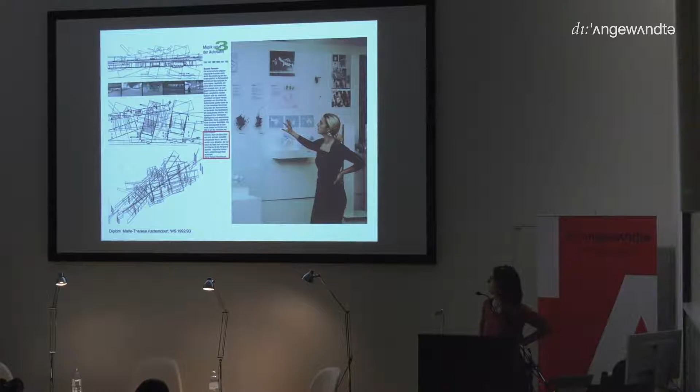So when I did my diploma, so old pictures, I was already dealing with zones under the motorway. It was all about abandoned space that should be available for people to appropriate. Something that we went on also later on.

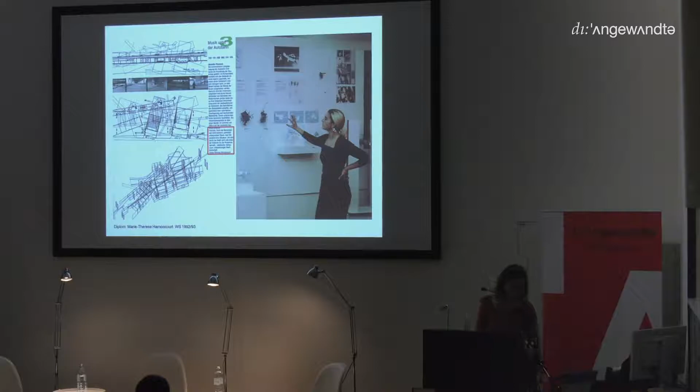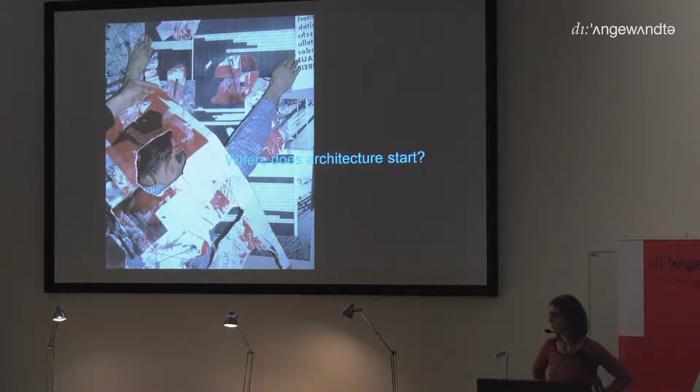I decided to go back to work, to go on working with the so-called group of former students of Wolf, like Wolfgang Grillitsch and Florian Haydn and Ernst Fuchs, called the Poor Boys Enterprise. And we were all looking for an architecture that is intense and that is motivating to do something. And we were looking for this kind of architectural answers.

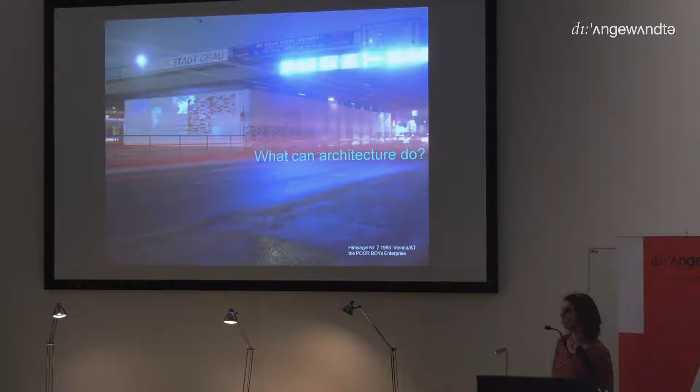Where does architecture start? What can architecture do in the street? The city was our sketchbook, and we were doing installations or just markings within the city and trying to find answers to these questions. We were dealing a lot with language. We were dealing with what function means in architecture.

We did it together with Bernhard Winkler, who was also studying at the Angewandte. He was the one who was always standing at the copy machine all day long. And it's a book where you can read in different directions. It was all about associative reading, about neutral fields where an image and a text and a number and things that overlap are inspiring.

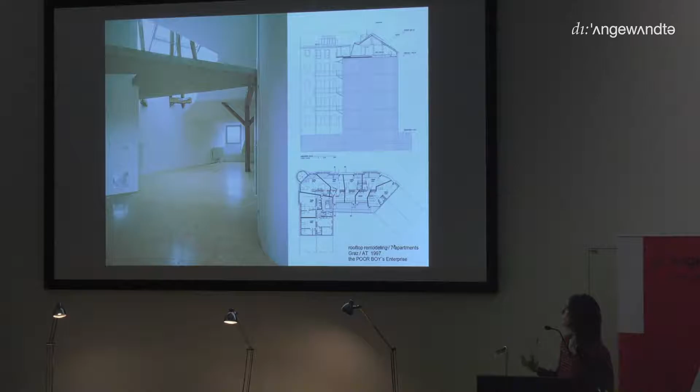My first realization within the group was the Dachausbau in Graz. It was actually social housing, meaning it was funded with a reduced budget and had to stay within these limits. But it was important to have the entrance to the different apartments be a communal balcony on one side, and also have additional areas that could be adapted by the people, to put a chair, to sleep up there. So for us it was always important that the user can find possibilities to inhabit the space.

Ernst finished the Zirl House. It was actually this process of the neutral field that started already as a student, already in the studio of Wolf Prix. And it was a design process I don't want to explain at the moment. I just want you to feel what kind of different thematics we were dealing with. The process of design was something that interested us a lot.

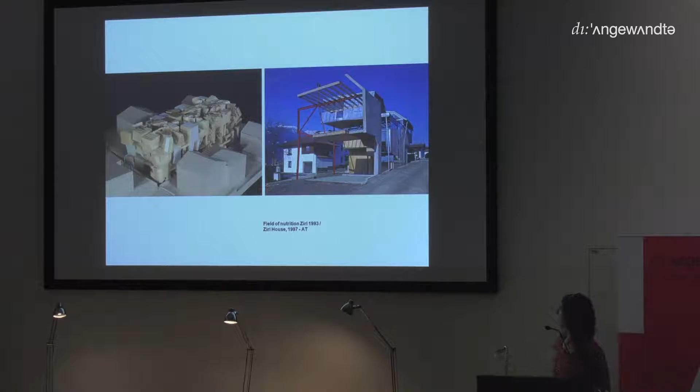Out of this abstract machine, or block with a lot of information, in the end this house was shaped. And to these abstract machines there were local parameters, context cut into this mass, which made this house connected very strongly to the context. In this case, it was the shadow of the surrounding houses you can still see, which split the house into a shadowed and a non-shadowed area. It means all these operations also led to special qualities within the house.

The first project we did in 2000 as the next enterprise was Stadtwind. It was a white spot, a leftover space that we wanted to activate, called Urban Breeze. It was a former abandoned fruit store, vegetable store, that was at our disposal for two weeks, and we stood in this space which had lost its original function as a street-front grocery.

This apparent lack of function is pleasant, emancipating the space from the belief that it must function. It entices one to add something to the space, to blow in infiltrating material that activates this exceptional state and transforms it into an urban environment. The glass entrance is to be removed, the wind is channeled into the interior of the space. The vacated grocery changes into a space that catches the wind. It is the urban breeze that carries him away like a dream.

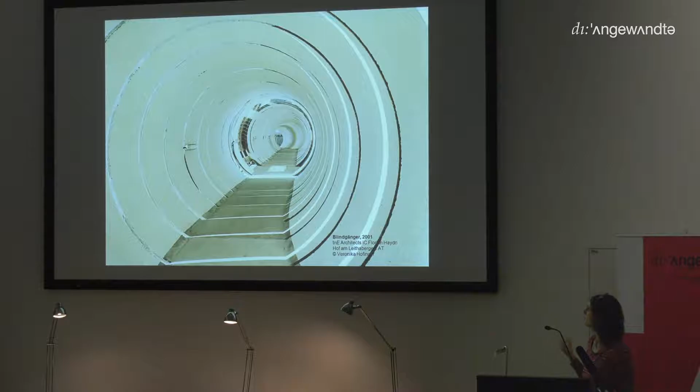Another white spot, meaning actually empty space, is the Blindgänger, a space containing fans. We did this for a cultural site in Lower Austria, and we had this idea that these fans should also be an additional space that is 24 hours open for the public, but could also be used for this cultural site. We said you shouldn't close down a cultural site, so it was connected with the public lighting, so that it's part of the street system in the end.

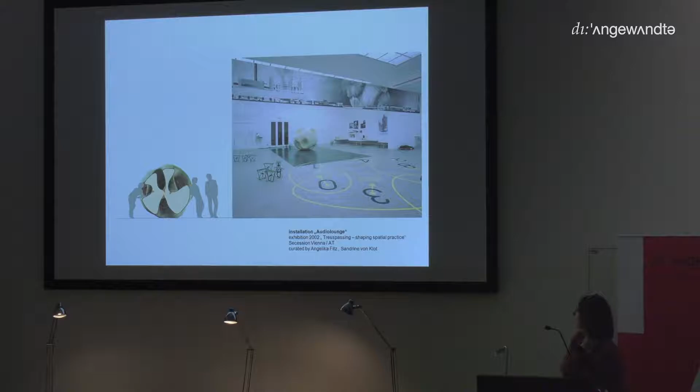The installation Audiolounge was the first one we transformed; we used the computer to transform and generate an object. And I want to show a little film we did, also with Johannes Mücke, Mark Hoffenscher, who were also students from Wolf's class in former times.

There was a kind of associative talk Ernst and I had on the internet, where we said it shouldn't have an up and down, endless deep holes where you're swallowed, where you get thirsty for audio, because it should be an audio installation for an exhibition at the Secession. We didn't want to do something with headphones, we wanted something where you get spatially involved.

These are the different interviews, and if you went close to the holes, you could precisely hear the interview. If you were farther away, it was more a murmuring. It was a very easy concept, done with a standard program, taking a sphere, because no up and down, defining parts or fields for the interviews, and then deforming the whole audio lounge.

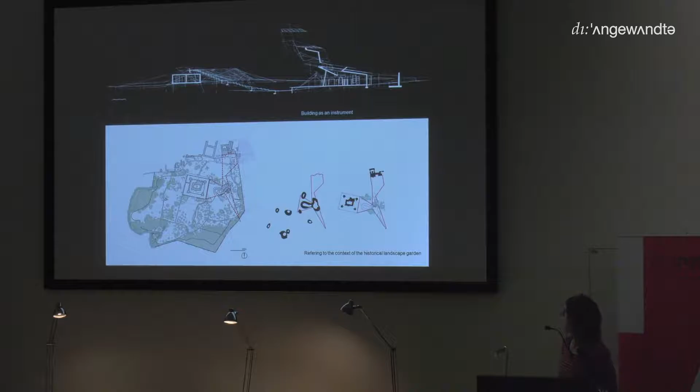And this is the Openair Pavilion in Grafenegg. It's a space where you don't know where the building is ending, or if it's a building or if it's not a building.

Here you see it from the side, from the stage, which for us it was important that you can look into the sky. This is the backstage area, which can also be used for other parties or operations. For us it was important, this sequence, walking through the park, also walking through this installation, that you have this feeling of entering.

So if there's a venue, you're entering, you're getting into a space, though you're outside the whole time, having this situation of the concert. And we were very lucky because it has a very good acoustic.

Everyone was nervous, but when the first tests were done by the orchestra, everyone was happy because the acoustic is really good.

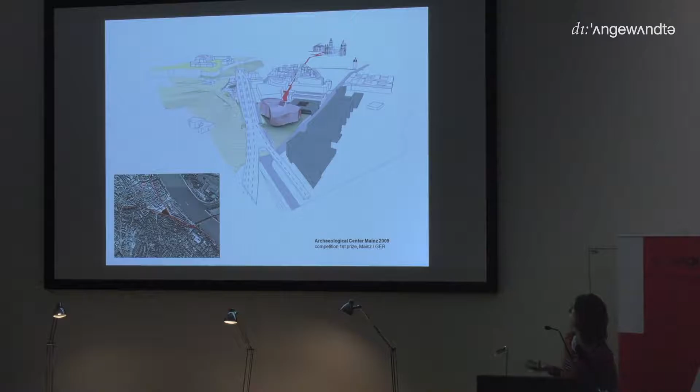On the one hand the urban situation, a park, a standard building situation on the right hand side, and the close connection to the inner city, which we were overlapping on the side, splitting the program into 3 parts: a topographical part, a standard building, and in the end an open free structure building.

This is connected to the inner city and is also a kind of walkway from the city into the building, and the exhibition, which is an archaeological exhibition, with elements and objects.

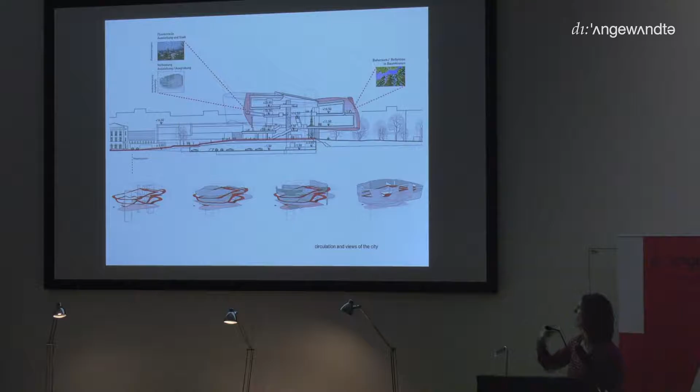As there are a lot of archaeological sites in Mainz, through wandering around, you can also have a look onto the city. So this walkway through the building starts outside and leads you inside, being in between the city and the building.

And this connecting of program and space is something where we think this activating of outdoor space can happen. In a bigger urban context, Verteilerkreis Favoriten, we also started to activate a leftover space, which is inside the island of a roundabout, with programmatic and spatial connection to the surrounding.

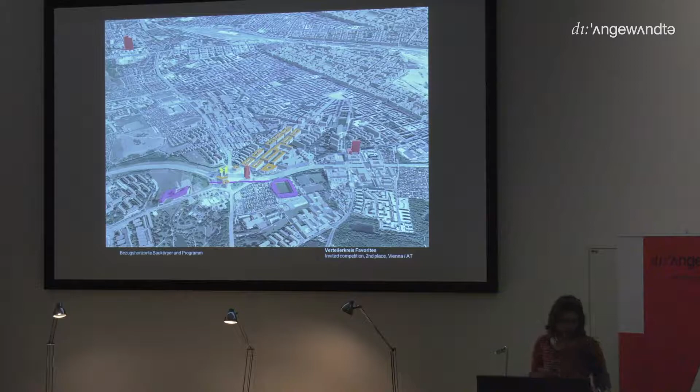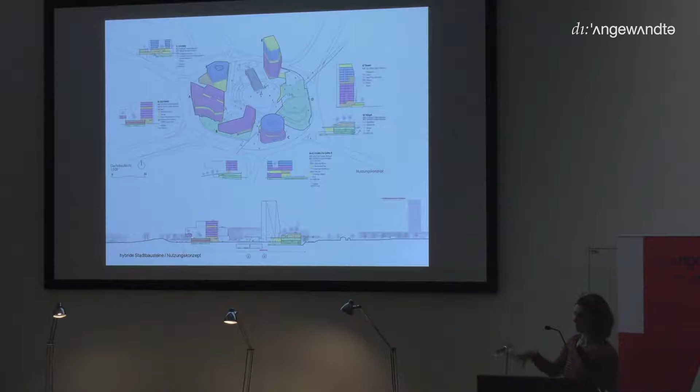The programmatic connection we also call hybrid Stadtbausteine, I don't want to translate it. We're using program from the surrounding and putting it onto the island, trying with this mixed structure to activate this, at the moment, leftover space within the traffic roundabout.

The thematic of reprogramming an existing monofunctional building or area was part of our interest in our Biennale project, where the former Siemens Hauptzentrale was turned into an active urban concept.

The existing office structure should be used for temporary living, which means the surrounding is changing, as suddenly an office area started to become active over the whole day and the whole week. It's very interesting to see how these small steps of transformation really changed the surrounding, I would say in a kind of small scale situation.

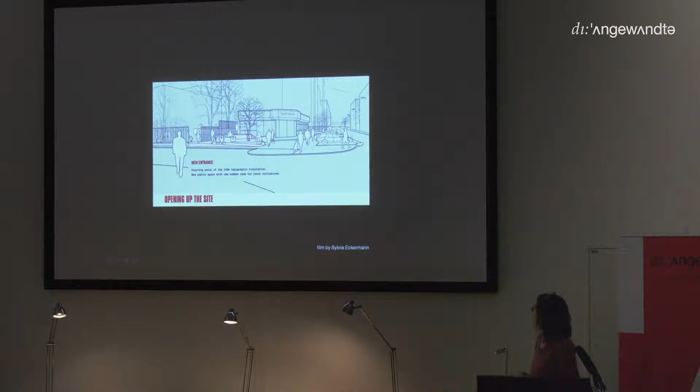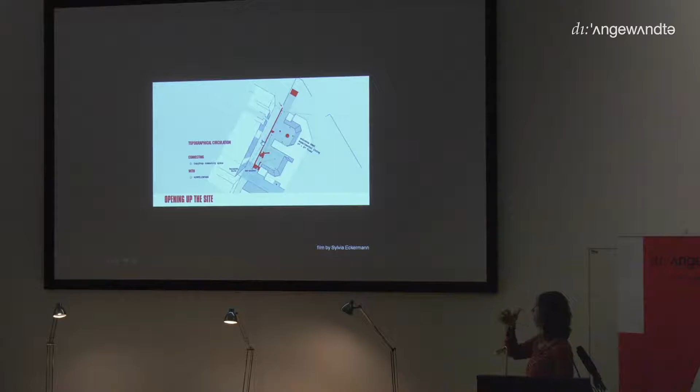For the Biennale we should find living facilities for refugees, which was also a very problematic political situation. Giving the surrounding a benefit to house refugees there was an important argument for the people in the surrounding to also be positive about the project.

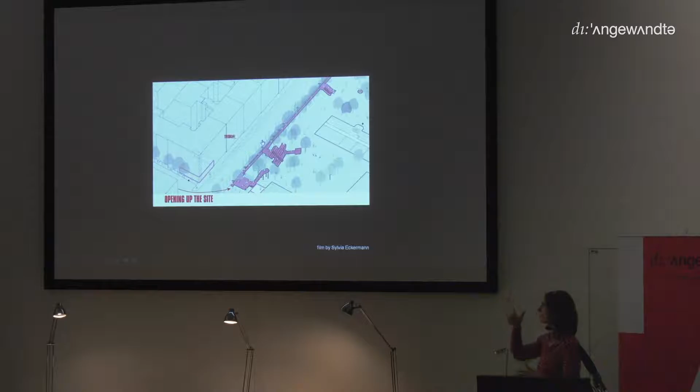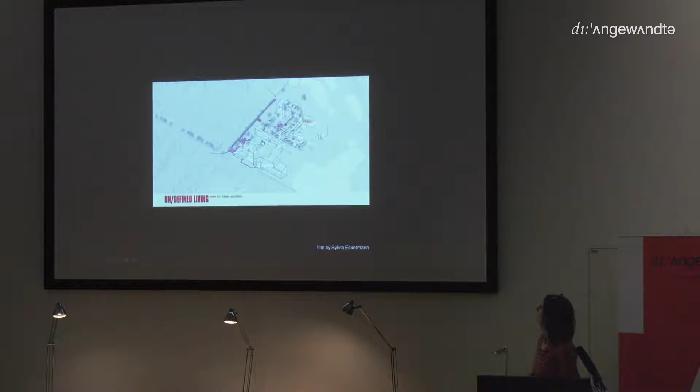The former building was very enclosed, as an office building, and we started a kind of promenade and opened up this park just at a small entrance area. But you have to know it's private property, and if people go there on private property, the owner has to deal with it if something happens. It's a problem for him, so it was great that he did it, that he opened the garden up.

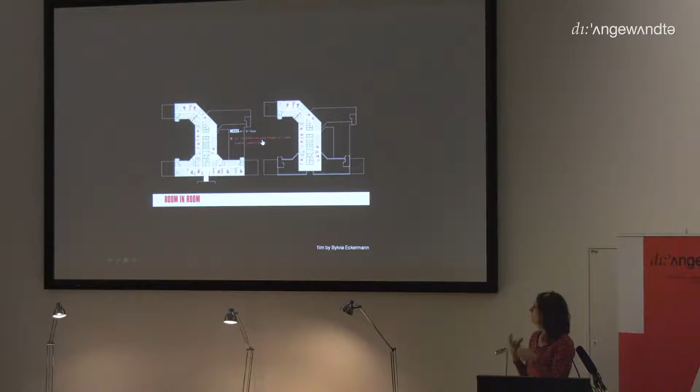In the upper floor, 4th and 5th floor, we did this concept for the HAWI, which is a room-in-room concept. It was this idea that the existing office situation is like leftover space, and we imply something for private use and sleeping and all your private facilities, but the surrounding area can be occupied or inhabited by the users. So it should be experimental living, an offer not just for students and refugees, but also for any person interested in trying out a different kind of community living for a certain time.

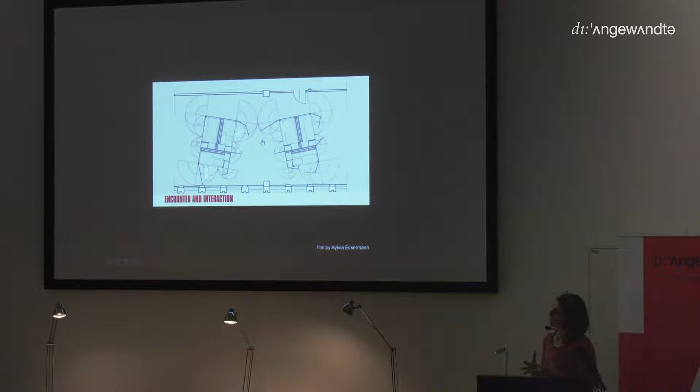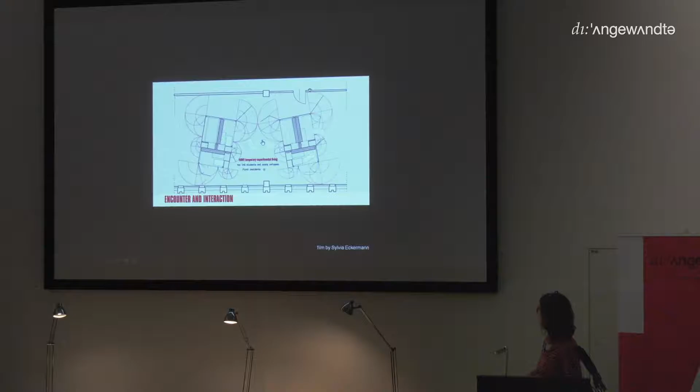We are also very interested in working on possibilities to transform this kind of system, or the whole situation of the Siemens Areal, which at the moment is developed as a reprogramming of something existing, to think about what would happen if you removed the old building and put all this program into a new envelope. We think this space-in-space concept also has a kind of political power, because having just a bed is very different from owning a space that you can operate within the surrounding. This student housing with 140 students is still active at the Kempelen Park.

We are also interested in, with the new media, how you can connect information and space. In the installation Nucleus, we are trying to put information from Niederösterreich through an act of transformation onto the skin of an object, and then reading this information through mobile phones and tools. For us it's interesting how we can connect digital equipment and possibilities with kind of spatial qualities, because wandering around finding out is more exciting than just sitting at a computer.

It has a lot to do also with spaces for learning and things like this. I think we shouldn't lose the space through all the media, and it's interesting to go on with concepts like this.

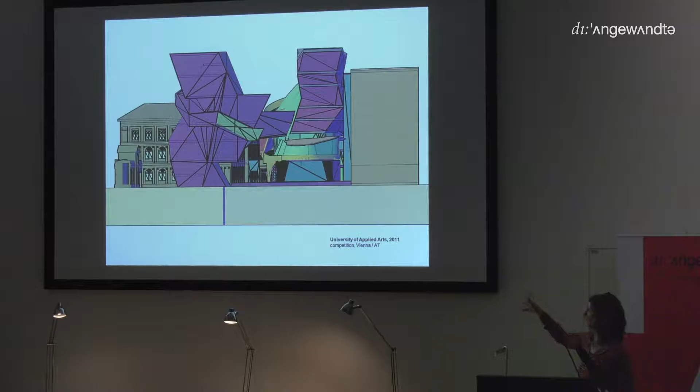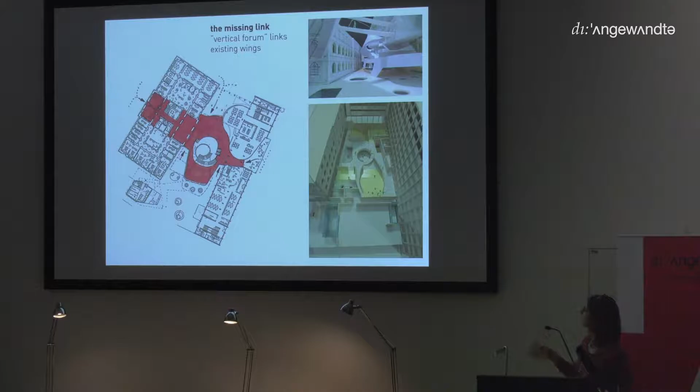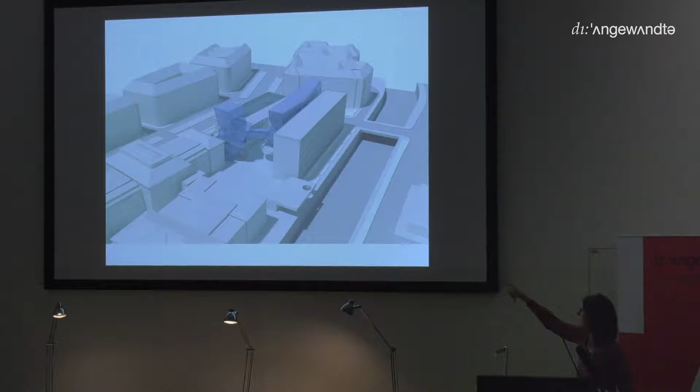The competition for the university here I'd like to show, because it should be an addition to existing buildings, opening up the complex and adding something that gives a new space system to the existing one, since you have space offered from 3 different centuries, which I think is a big potential for different spatial qualities. Of course, the heart that we were planning will not be built, but here you can see how this addition was put into the courtyard, and an additional tower also facing the ring, because it's important that something is shown to the ring. For us, the connection with the MAK, using its open area and facilities together with the university, would be a good step in the right direction.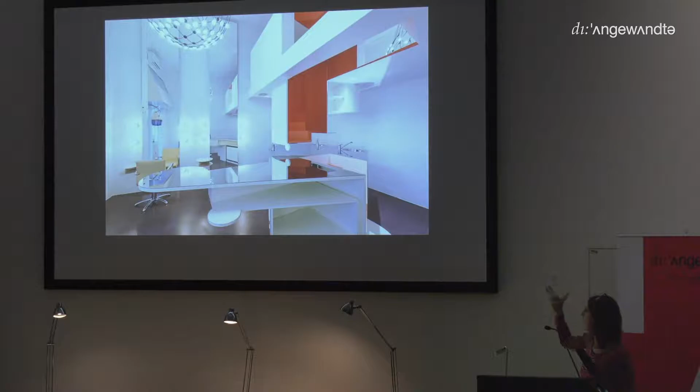And it's not blocked, so you can appreciate the situation without being inside. The whole concept was to add additional qualities to an already nice existing venue and site for swimming at Kaltern. Through this enlarged deck situation or plaza, the sun deck, we had on one side a lifted area where you had a completely new view to the situation around.

On the other hand, underneath, we call it the aquarium, a covered situation with enclosed additional spaces for additional possibilities to use.

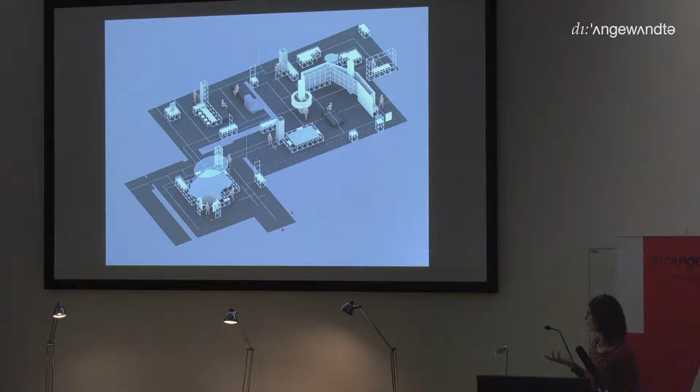The last exhibition we did, and we started to do more and more exhibitions as a kind of testing possibility, which I think is very interesting, was for Wien von oben, an exhibition dealing with cards and views onto Vienna. We did a kind of three-dimensional raster system, because you have it with GPS, but also with maps. We tried to involve the whole space with it, because we also have this grid on the ceiling, and we tried to make it so that everything is carried by this kind of structure, making it very light in the end, and a very open space where you can really concentrate on these nice objects.

And this is the pavilion we did one year ago in Grafenegg, and I think very soon we should make an alumni meeting there to drink something under this roof. And I say thank you, and I hope I was not too long.

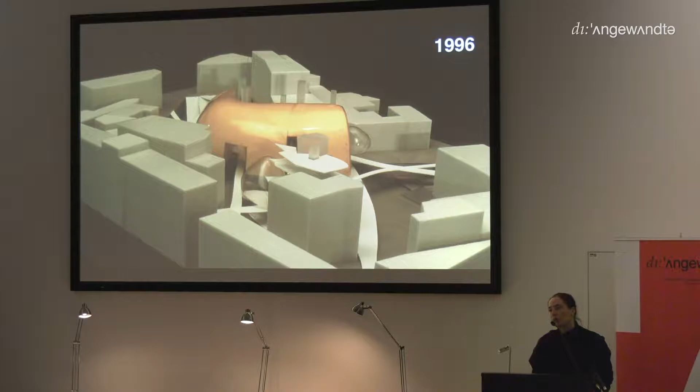But what I also took on from the studio and from the exploration there was to think about how we will be living in the future. So I was especially interested in housing, in how we will live in 50 years, 20 years, and what kind of societies these will be. Because I always thought that when we define the societies or the social interaction, the space will change accordingly. So any new forms of living together will also come to a new form of housing.

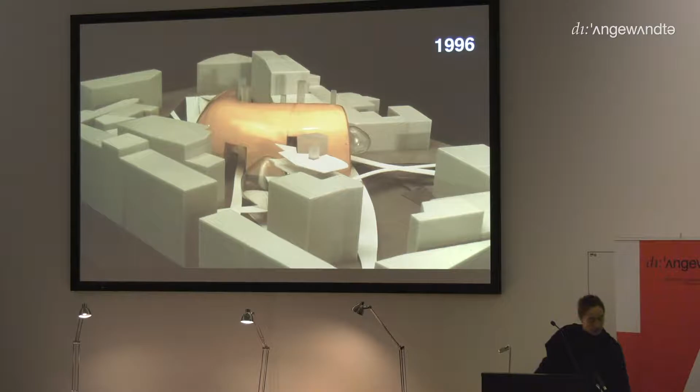So that was 1996. But already then I was thinking a little about how these spaces could be in 2046. So I invented user-driven scenarios with different kinds of users: people who live together in a larger family like a tribe, the symbionts; people who are more parasitic individuals who dock onto existing structures; and people who live in complete virtual space, the cybernauts, and the trinks, the triple income no kids. After 50 years they would have all merged and come together, boundaries blurred, and new social forms arrived. But what I was also interested in is seeing the virtual and the real space becoming one.

And through thinking about how we can live in many years, and when you think further, inevitably you have to think about how we will be living on the moon, on Mars, in the universe, on a generation spaceship, and how our social interaction in those spaces will look like.

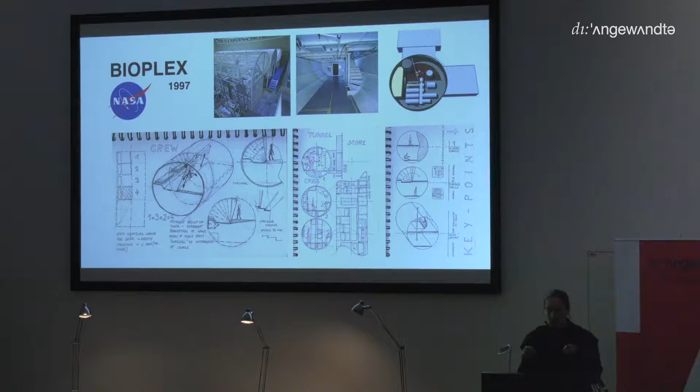My investigations were more into how to create, within this very limited but also predefined space of these cylindrical modules—because they were already in the building of this facility—spaces where functions overlap, similar to what Marie-Therese said right before, and also to make them more transformable so they could be used in more different ways. So, very simple, small interventions. This was the aim.

After the Space University, I came back to Vienna, and some people always wondered why. But I think it's because I had already spoken to Sandrine von Klot, who also studied here at Wolf Prix Studio, and we had somehow arranged, while she was in LA and I was in Houston, that we would start an office together. We took on board Birgit Trenkwalder, whom I knew from my studies at the Technical University, and we started an office.

I'd like to show two projects which are somehow representative of our work. One is Back Projection, a project which we initiated. We worked on a very experimental architectural basis. This was an installation out of cardboard, which you see on the left-hand side, previously shown in a German museum, and we wanted to take that on and connect it to the virtual space.

So what we suggested to Gerfried Stocker at the Ars Electronica Festival was to build that, and the Future Lab helped us program the interface, the online interface. The idea was that there's actually a real space, represented by two movable panels, which could be connected to a virtual platform.

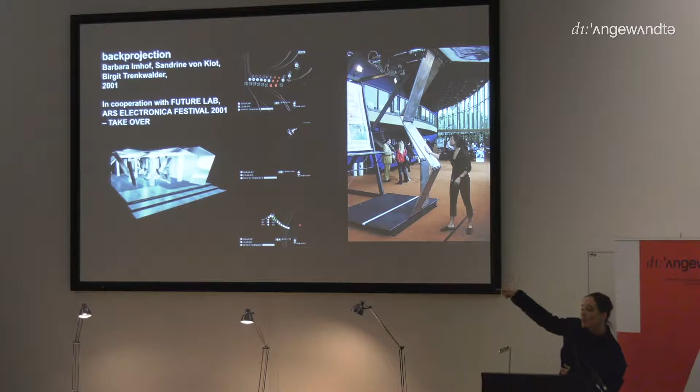So on the internet—this was 2001—together with the Future Lab, we designed and programmed a game surface, which was a representation of the space we originally envisioned to build. So when I would move the panels here, if a gamer sitting in Tokyo played this game on that surface, the panels here would move. It was on an equal level—the real and the virtual were connected.

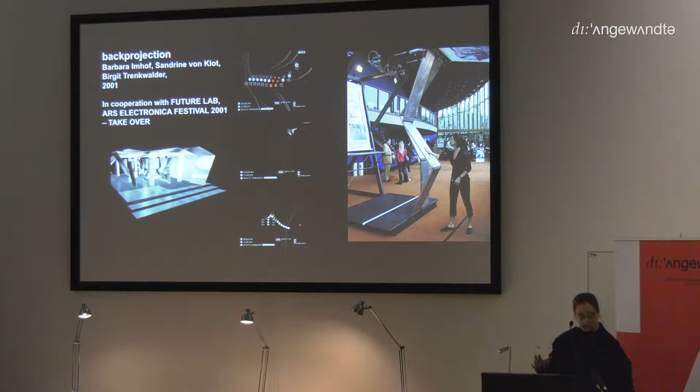So this was one aspect, which was more an artistic work, and the other one was what architects do here in Vienna when they start offices: remodeling. This was an invited competition, which we won, by the Social Democratic Party, who runs the EGA, a center for women, for women's affairs, for gathering, for discourse.

I think the two most important aspects are, first, the opening up to the street—this is on the left-hand side, the street facade, in Windmühlgasse in the 6th district here in Vienna. The other part was more intimate, smaller meeting spaces in the front of the house, then a courtyard, and in the back a little auditorium suitable for panel discussions or theater plays, with a little bar. The other important interaction, still used for their summer events and festivals today, is that we installed this roof, which gave an outside space to the inside community space.

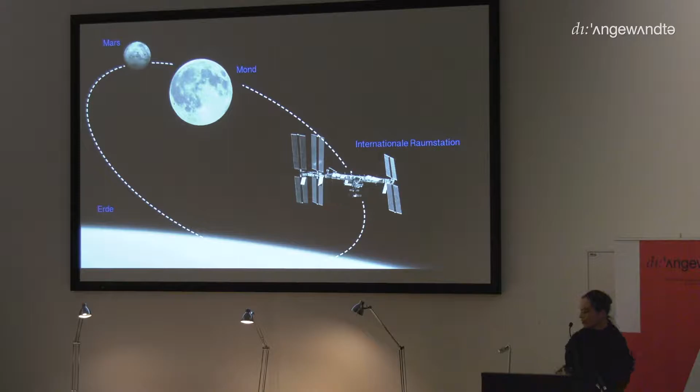I'd like to present a few projects, but I think the most important one, which Bence already mentioned in the introduction, is the self-deployable habitat for extreme environments.

Our main business is working in contexts or environments that are very extreme. It's very hot, or very cold. It could be without air, or without sufficient air, and without gravity.

The SHEE habitat is a simulation facility built on Earth to test and train astronauts. It's a small facility, not as big as Bioplex, the project I worked on at NASA, but it's a transportable test bed. It was conceived so that, ideally, if developed further, you could have it as a research station in the Antarctic, an autonomous research station, or as a high-tech unit in case of disasters.

After we finished building it, we were quite lucky to bring it to Rio Tinto, in Andalusia, south of Spain. As you can see, it looks a little like Mars, and it's one of the Mars analogs - an internationally accepted Mars analog site, meaning it resembles specific features that allow you to test Mars simulations in an appropriate way.

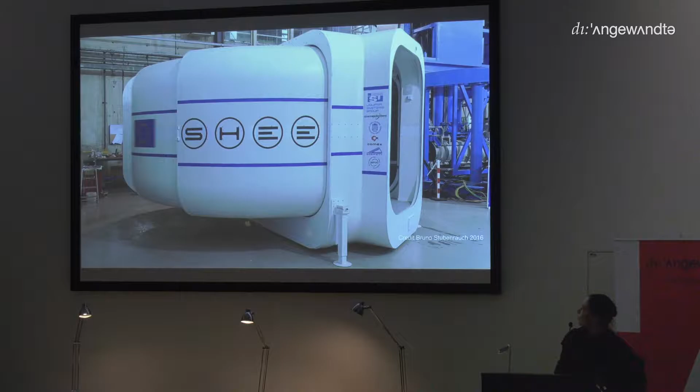So this is still nearly finished in the building stage. And what's special is that it's quite small - 28 square meters, built for 2 people to live in there for 2 weeks autonomously. It has 50 cubic meters volume, which is sufficient when you think about recycling air - you need at least 25 cubic meters per person. And it has a diameter of 6 meters.

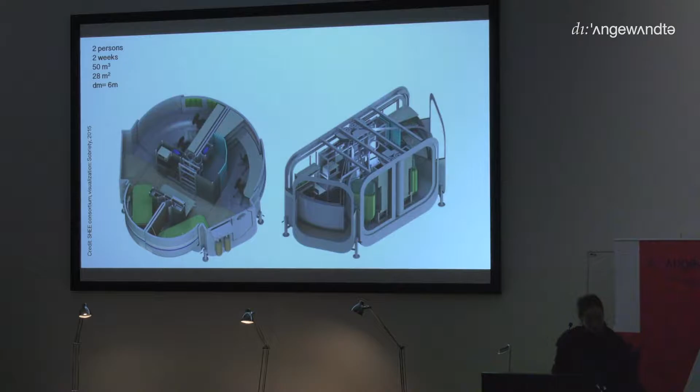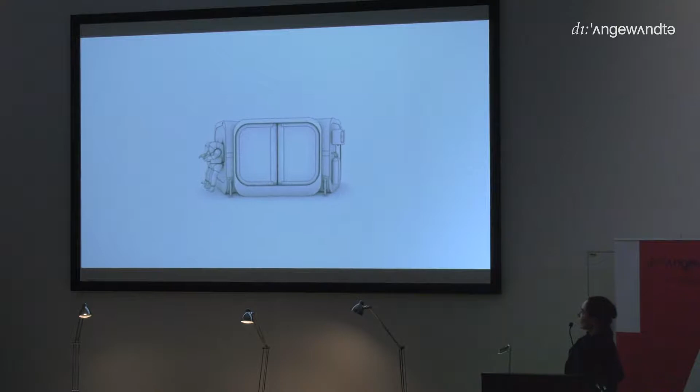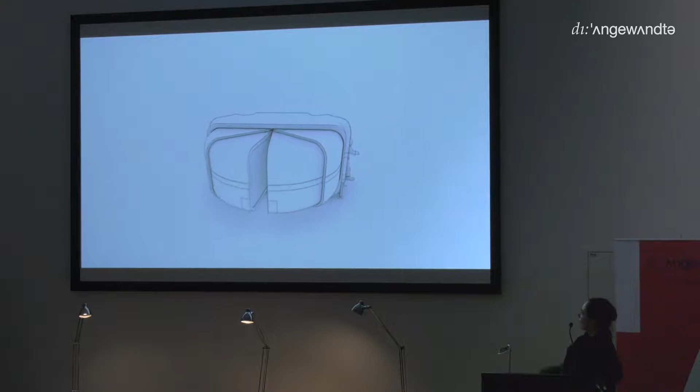So this animation shows the deployment mechanism. This is approximately the volume of a standard container, so it can be transported by standard means on terrestrial grounds. It has 6 petals - 2 and 4 basically - and there's a specific choreography how they open up.

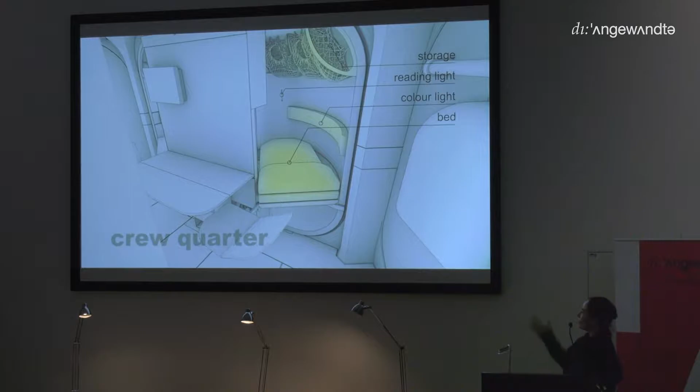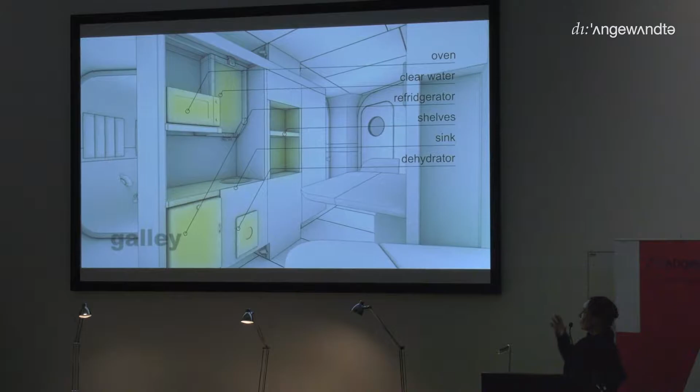It has a main center space for the 2 people, for the crew together, to eat, to hang out. It has a private space, which is also very important for psychological reasons. Also a workspace. The machinery of air and ventilation is quite loud, so it's quite important to think about how to reduce the noise and create somewhat less noisy places.

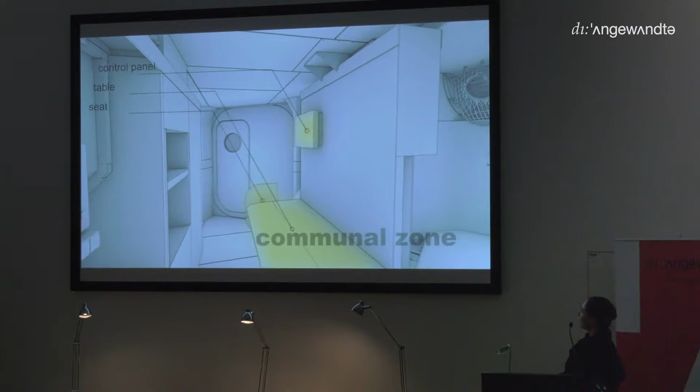It has a fridge, trash compactor, a microwave oven. There's one control panel which actually controls the whole environmental system.

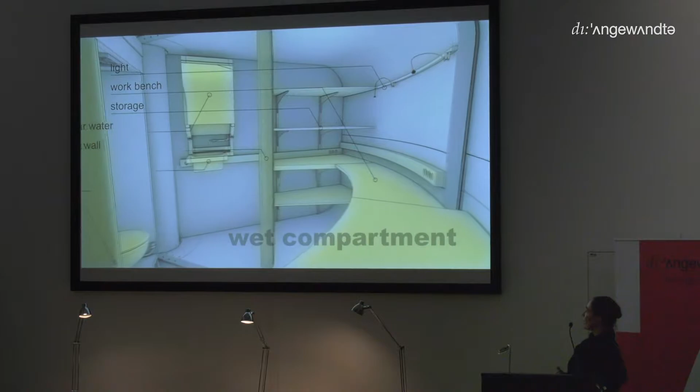Then there's one part which is the so-called wet compartment. It could be used as a laboratory, as a space for maintenance, for repair, and there's a tiny little so-called hygiene facility - that's what NASA always calls it. It has no shower, of course, because showers take a lot of water, which you can't have in space.

And very interesting, there's this so-called suit port. To prevent contamination, you have a double backpack. Basically, you step into the suit, and then you go on and walk on either Moon or Mars, or somewhere else.

Here you can see how it's transported - either on a truck, but what is also another specialty is that it actually has that space, that volume you would need, or could bring to another planetary surface. So you see that 2 back-to-back actually fit into one of these, with this 6 meter diameter, into one of these heavy lift launchers.

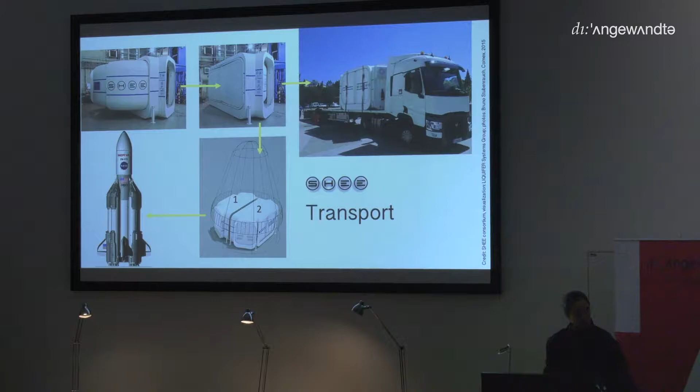The main space was used for medical checkup and preparation before people would go into the simulation, because we also built what we didn't have in the beginning - this kind of suit port mock-up. Everybody needed to be checked. First of all, it was very hot there, and secondly, the suit was super heavy, like 35 kilos or so, with all the communications and the frame, so that nobody with too high blood pressure could actually go on these missions.

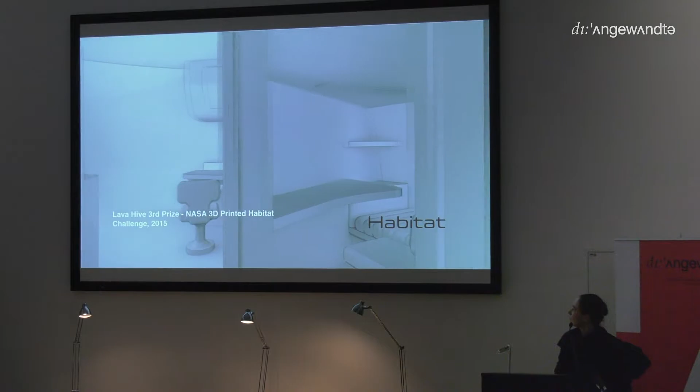You can see that the Bioplex role model is still very present, as there aren't many ways of incorporating all these strict requirements. So you have crew quarters, the habitat, a laboratory, a greenhouse, and a docking port for a pressurized rover, which is basically a mobile research facility like a caravan.

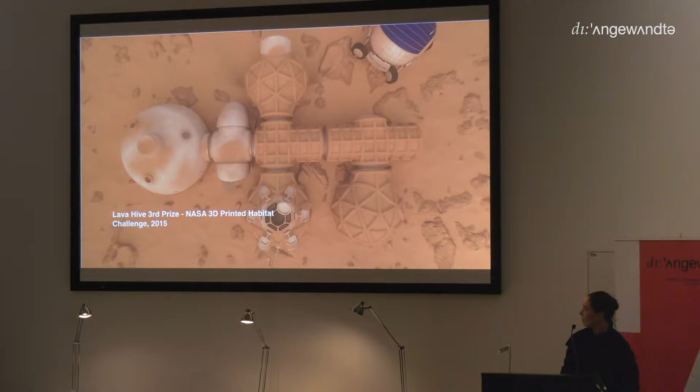Another project right along that line, since Lava Hive was more at a conceptual stage, is one we won called Regolight. That involves sintering regolith with solar light.

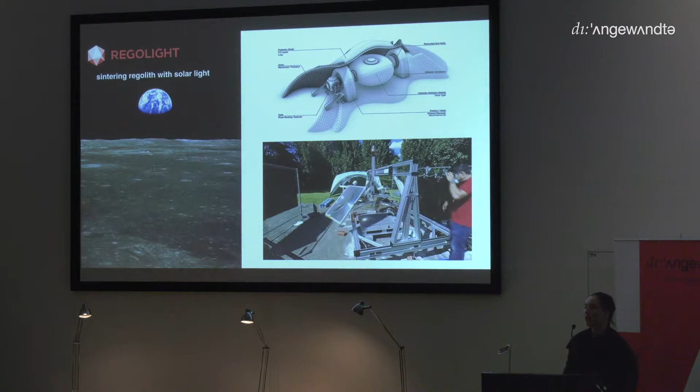Regolith is lunar or Martian sand, indigenous sand basically. What we're doing here is taking a sand simulant, a lunar sand simulant, which has similar characteristics to what we'd find on the moon, and sintering it into interlocking building elements.

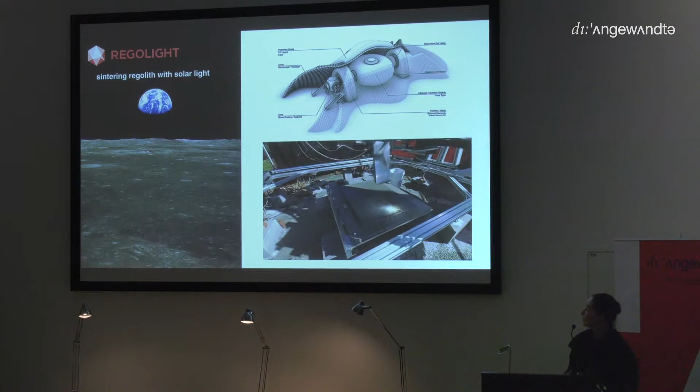It's like Lego bricks basically, but a little more intelligent, built on space filler geometry. We've developed a couple of geometries. What you can see here is a test where we take this sand in a large mobile printer to try and create these interlocking elements.

There were other tests also in vacuum, but it's quite a challenge to get the printers right and get it into the vacuum, or get the light right, so that it's all a proper simulation of the lunar environment.

This is the last project I'm showing. It's a greenhouse for Moon and Mars, and it's interesting because it touches on a couple of very urgent issues, like food and growing food in very dense spaces.

We built this with 14 partners. We took 2 containers and built a greenhouse inside them, and the test site is Antarctica.

It comprises 2 parts. The part where the entrance door is, is the so-called service section with a small laboratory and a lot of machinery, and the other part, the back part, is the actual greenhouse.

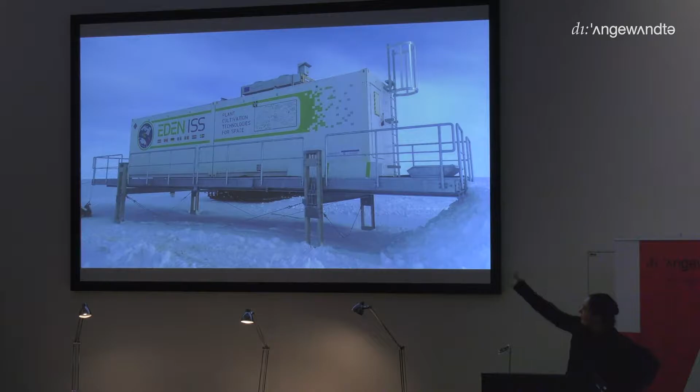This is a picture from yesterday or two days back. They've already managed to put the containers onto the platform. This is close to the Neumayer 3 station, which is the German research station in Antarctica.

When you think about the Antarctic continent, it's right opposite South Africa basically, and then inland about 2 hours flight. They built the platform last year, and just installed the 2 containers, and will now equip it with all the necessary items.

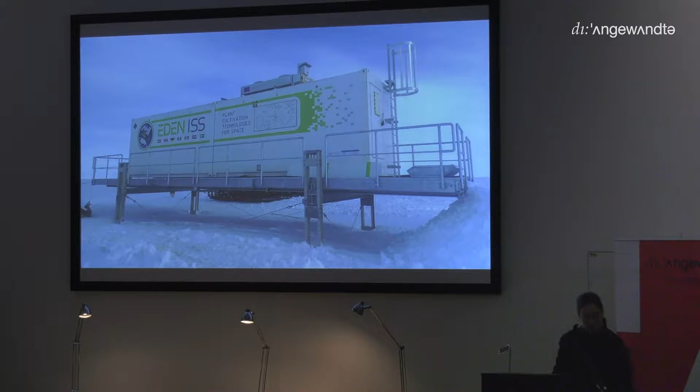We had a previous project, Bionometrics, but the most recent one was looking at growth parameters, and also looking at what we already have and how can we go beyond the state of the art. We looked at growth principles through the slime mold, at material systems, growing mycelium. We also looked at closed loop systems, at bioreactors, and of course at 3D printing and taking local resources.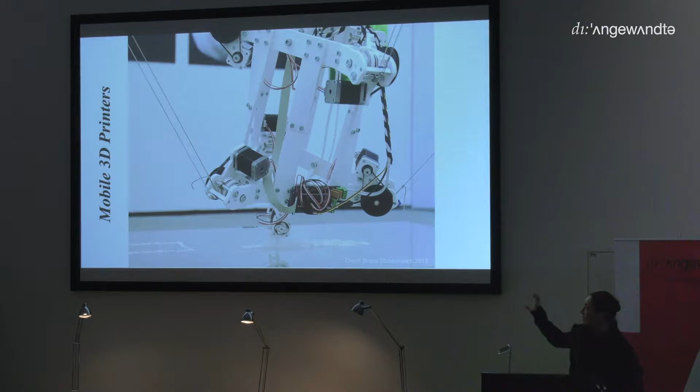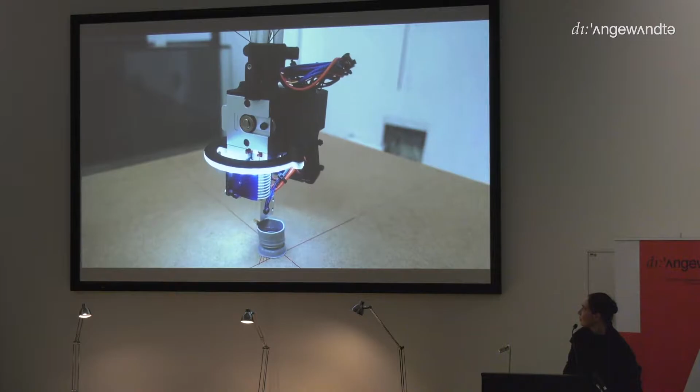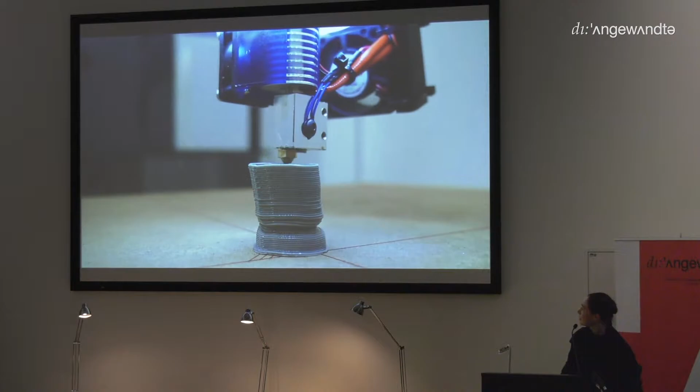So we had two different 3D printers, and you might have seen the exhibition, some of you at least. This was developed by Damian Minowski, who's also a Prix Studio graduate, so he was in the core team of that project. This is a hacking of MakerBot, and the interesting thing was actually the models and the prints you could do.

So sometimes it's very difficult to understand, even for us, not only for other people, how everything can come together. But we're slowly, I think, trying to connect, or we can connect the dots of the projects. We are still pursuing the line of biomimetics.

And we've gone a little bit further into bioreactors, a project which is called Living Architecture. This is about, with a lot of synthetic biology and a lot of scientists and engineers, bringing together three types of bioreactors. One is a microbial fuel cell, one is a photobioreactor, and one is comprised of synthetic microbial consortia. So they're synthetic, artificially engineered microbes.

What they should do is produce energy, clean the air - that's the photobioreactor - and take the phosphate from the gray water. We built a prototype, which is now in the laboratories of the University of the West England in Bristol for testing. The idea is to combine all these three parts and create a partition wall for a household to treat the wastewater.